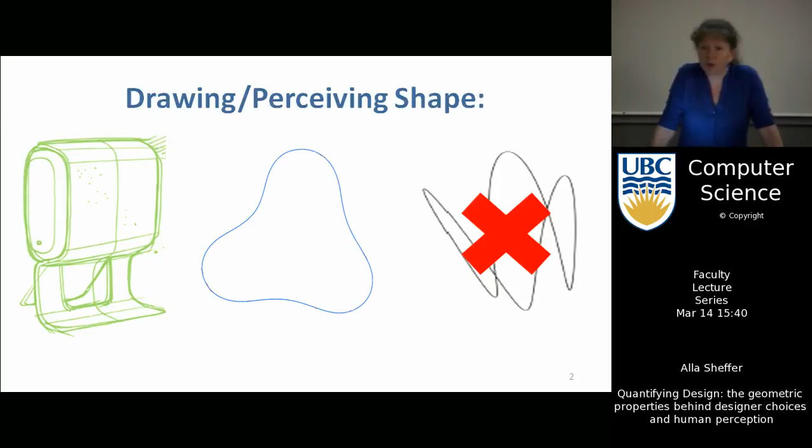Because if you take this object in the middle and you draw its silhouette, by now you don't understand the shape, right? It's a very different shape. You have no clue what exactly happens there in the middle. So the choices that artists make are really there to help you understand what goes on.

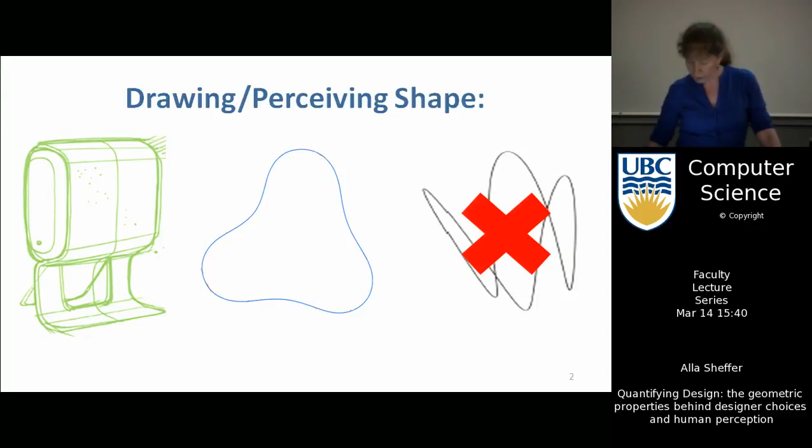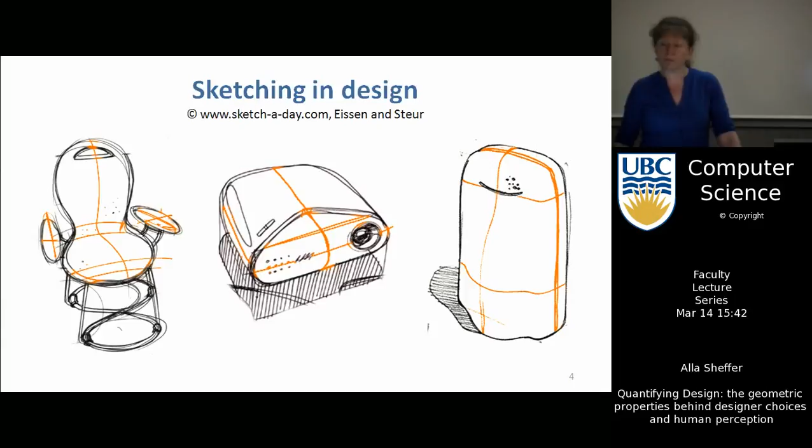What we are interested in is to try and use them to understand what actually goes on in the drawing. So our goal is to start from this type of drawing. The orange lines are the same set of orange lines you have seen before. This is what's known as cross-section lines, that's what design literature refers to.

And the only consensus in design literature as to what a cross-section is, well, it's an intersection of your surface with a plane. If you look at each one of them, you can visually understand what planes those are in 3D. And somehow, with the help of those lines, we understand what this shape is. That's what we are trying to get our algorithm to do.

Why? Well, because if we have an understanding of shape, what we're aiming for is to understand the directions the surface is pointing at. In other words, what we are getting out is a normal field. So where does the surface point to?

Here color encodes direction. Blue is sort of pointing along this axis, pointing over there. Magenta is somewhere there, and cyan is up, right? And now we sort of visualize the shape.

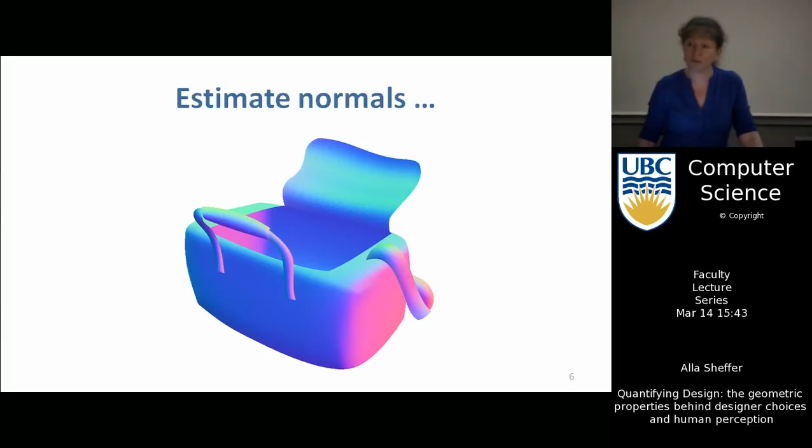Now, why does it help us to get a normal map? Well, because now those people who either took computer graphics at some point or have some knowledge of what graphics does will tell you: if I have normals, I can now use those to compute lighting. I can figure out positioning lights in my scene and figure out the interaction between those lights and my surface.

And why is that good? Well, many people in this room can probably draw this. I don't know if everybody can, it does require a certain amount of artistic talent, but it's relatively fast if you know how to draw, and you can sort of cheat a little bit even if you don't, and do something reasonable. Getting an image like this, that's beyond, I think, the capabilities of most people in this room, and even if it is within your capabilities, it's extremely time-consuming.

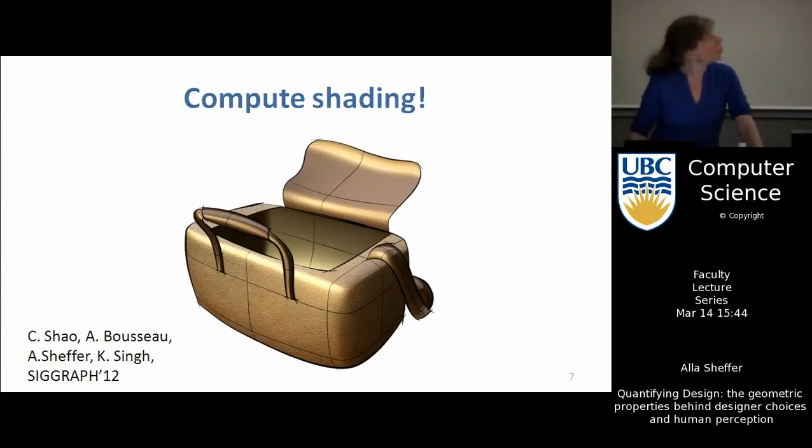Now, why do we want to do it? Because both types of drawings are routinely used by artists. The first group, which I'd refer to as line drawings, and notice that a whole bunch of them have those cross-section lines I was talking about earlier, are the type of things artists use when they have just their initial cool ideas. Here is my cool idea, let me try and describe what it is. So they usually do quite a few of those. They are very fast to draw, and people know how to do that very, very well.

But they also need the shaded imagery. Why do they need it? Well, because it's one thing to communicate with yourself, to commit your ideas to paper. It's another to show it to a client and convince him that, hey, my design is really the thing you want. That's where you really want the object to be more real. You need to generate much more concrete, much more detailed images.

Generating those takes a ton of time, right? You can consider the distance it would take anybody to go from here to here. So what we are aiming is to start from here and have our algorithm get us over here. But for that, what you need is to understand what exactly those cross-sections do.

Because somehow we all agreed that yes, when I show you this picture, and pretty much if I would show it to anybody, they would recognize it as a bag. But why? Why do we look at those lines and understand the shape that's hiding underneath?

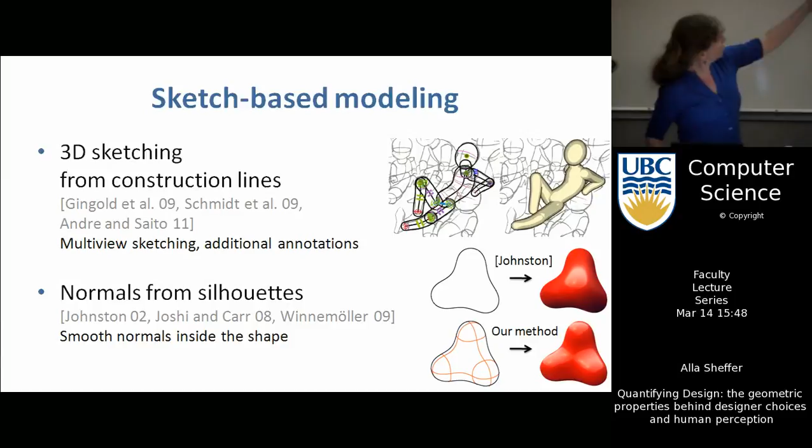With this understanding, with interpretation of those cross-sections, which is lines which artists are used to draw - if you look at artistic drawings, artistic sketches, these cross-sections are pretty much everywhere - with those lines, if we understand what they mean, we can generate the shading. People would actually agree with this, yeah, that's what I intended on this model.

Now, what's the challenge here? Well, we need to understand where and why artists draw cross-sections and how people understand them. Because, well, yes, they draw them. But why do they draw them? When you talk to artists, the answer is, well, yes, cross-sections explain shape. That's a very useful statement, but it doesn't tell us anything about how I make my computer understand the shape the same way.

Now, what I'm going to suggest here is our hypothesis about how that happens. So why do artists draw them, where they draw them? Because artists are not drawing them in random places. Artists are indeed drawing in the places which are necessary to explain shape, except they don't necessarily know how to quantify what that means. And it's very much related to how people perceive it, because the whole point of an artist drawing those lines is so the viewer will actually understand what the artist is drawing. So there's this strong backlink between an artist trying to make the object as clear as possible so that people will actually understand it. So there's two strong linkages here.

And what I'll talk about is what do we think that artists do. And then I'll validate it through both the algorithm I already mentioned for normal estimation, and through a perceptual study, to check whether you, the audience, and people in general, do see those things the way we argue they do.

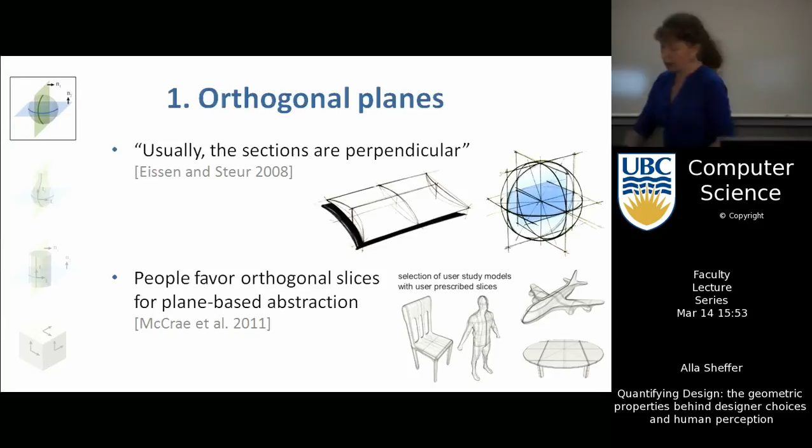So the first observation is, when we look at those cross sections, they are not randomly positioned. They are always, in every image we looked at, drawn in orthogonal planes, right? So if I define a plane for my cross-section, remember cross-section is planar, those planes are going to be orthogonal. What else?

Physicality. Now I'm guiding you toward answers. What else is interesting? What else makes those lines so effective? So the curvature of the line gives you the shape of the roundness.

Curvature. That's a word mathematicians often know, but there are enough people here who took some kind of math at some point in their life. And yes, there is a strong correlation between curvature lines and the lines artists draw.

Now notice, a lot of curvature lines are not going to be planar in reality, but the cross-sections that artists choose are typically very close to curvature lines. So the way artists word it, cross-sections on the surface explain curvature. If a mathematician was to write it, he would say cross-sections are principal curvature directions.

But the people who did the perception research, or the people who do drawing, don't always know those terms. So there's an interesting, related observation from the perception literature: let's say I have this lovely cylinder. If I draw these two lines, aligned with principal curvature directions, and put them in isolation, people will interpret this area still as being cylindrical.

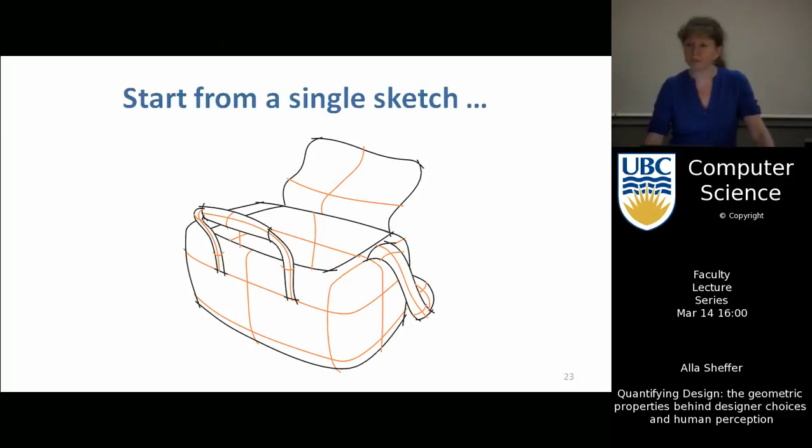Now, I would say there was one more very important observation, and that has to do with the whole image, and effectively with what I'll just call the choice of a viewpoint, because it's something you take for granted when you see an image drawn by an artist, but it's not something which should be taken for granted. When artists choose a viewpoint for an object, they don't do it randomly. You can draw this bag from all kinds of views, but this is the one which is most effective, because it's the one you actually recognize.

This is what's referred to as minimal foreshortening, expectation or assumption, and vision people sometimes refer to it as a non-accidental view. Basically, the idea is when you draw an object, you try to minimize the difference between the depth coordinate and what you actually see. So if you have a totally flat object, you draw it just from the front, because then you can see everything and all your distances are the same. But most objects are not completely flat, so you need to have some distortion.

The distance in 2D on any of those images will never be exactly the same as the distance in 3D. It's impossible. But what people are trying to do, and artists are very much aware of this, is find viewpoints, view choices, choices of poses and positions such that you can actually see objects clearly. A good example: we will never see a person drawn from this pose. If you want a drawing of a person in this pose, it will be in some kind of diagonal view. It will never be drawn from the front of the fingers, because if you're looking at it that way, you have no idea what you're looking at.

So there is really a strong focus on trying to get a good view. What it means for us is you want the change in Z between every two points, say if we're looking at the tangents of our curves, to be minimal. You assume the artist drew it from a view where minimal change happens in depth, because if there is change you're not aware of, then you don't understand the shape.

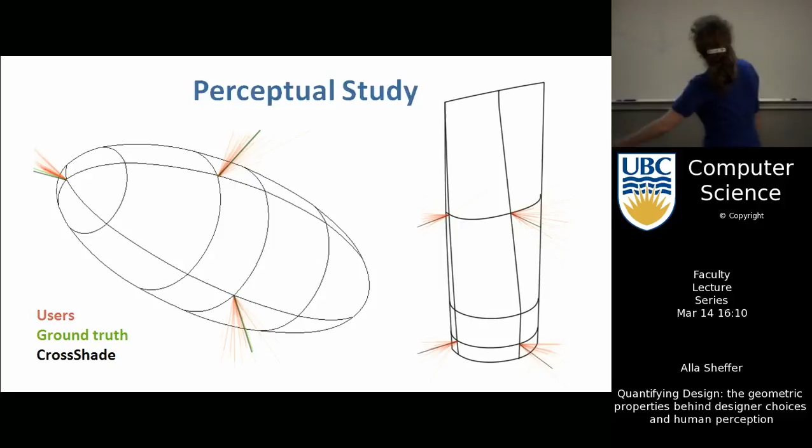Black is what our algorithm is saying. So what you can do, and I encourage you to take that study, is after you finish, it actually shows you where your guesses were compared to others. Now, what's interesting about those results is once you look at the median differences between people—discounting some outliers, which happen because some people either change their mind or get confused—the numbers are remarkably close. Think about those as degrees; 10 degrees is something like this. The answers are remarkably close, as if people give very similar answers. They're very close to ground truth, meaning people are pretty good at estimating the normal direction from those cross-sections or crosshairs, and our algorithm is also pretty accurate.

So that was a very good thing, because it means that we seem to be providing a good hypothesis. How motivated were the human subjects, and were there any timing constraints?

No timing constraints. It was more of a favor thing, not mechanical. It was more, here is a bunch of people I know in the lab, so there were art students and CS students. I don't know the exact mix because my colleagues in Toronto did it, but it wasn't a mechanical Turk setup where there's no motivation. So here I would say they were motivated to try and give good answers. We didn't have to do all kinds of double checks to make sure people weren't just fooling around.

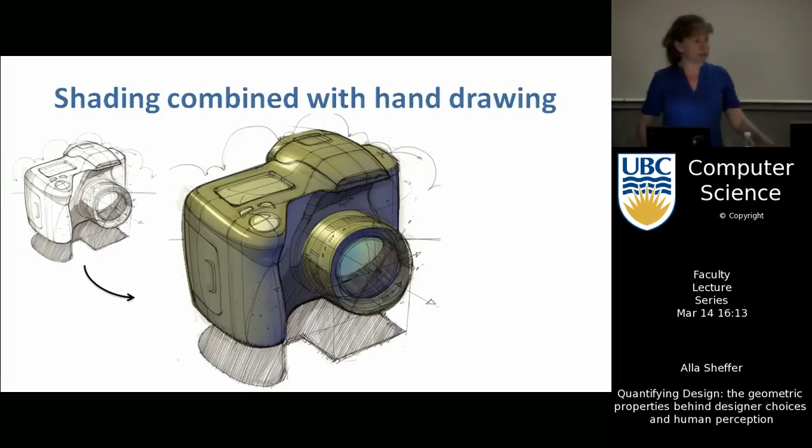Yeah, I think it's a good question. So, pretty pictures. I promised pretty pictures, it's computer graphics. You can recognize this shape, it's fairly simple. This is what the normal map of it comes out, and this is the type of cool stuff you can now do, and it's pretty neat. This came out from an actual sketch, we just overtraced our lines on top, and you can overlay it with the sketch to get really cool effects. Here are two other sketches, and again, you can do pretty cool stuff with them once you know what the normals are.

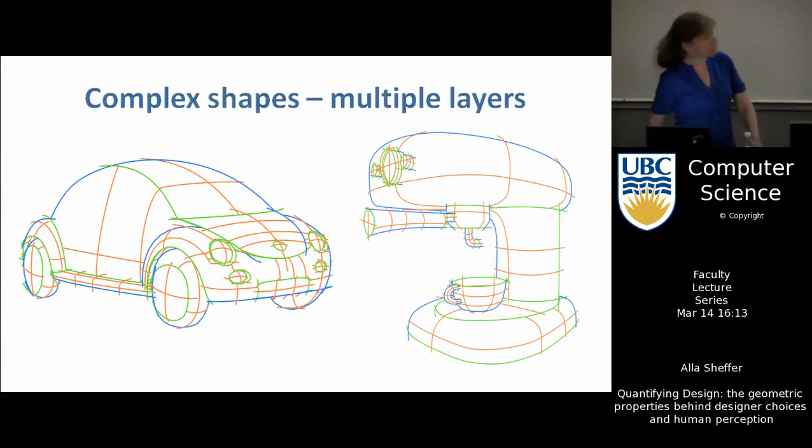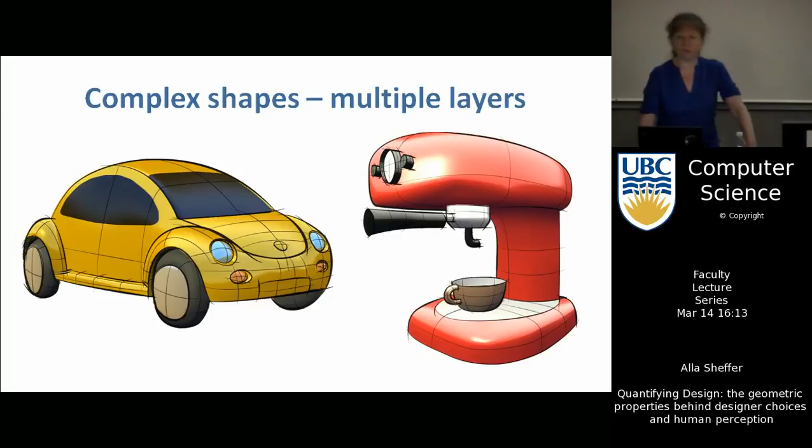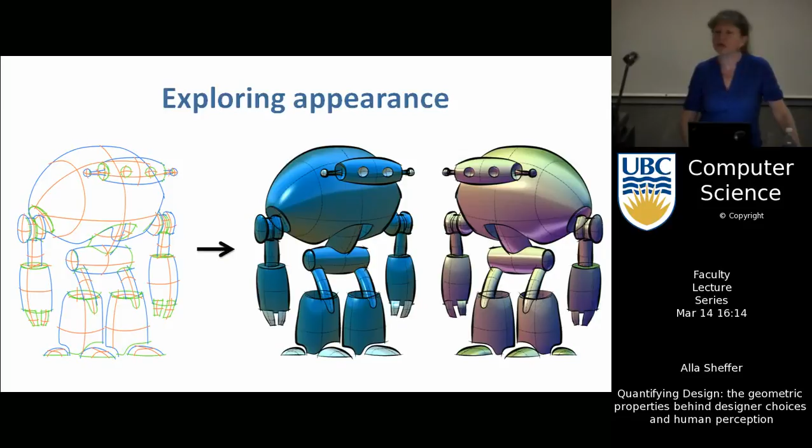Something which is quite a bit more complicated. Here we use multiple layers in the images because there are multiple parts, one on top of the other, so the sketch contains several layers of lines. Again, pretty cool stuff with very minimal input. And one of the cool things is once you have normals, you can change the color, change the direction of the light, change anything algorithmically, and get new pictures basically without any computation.

Just summarizing this part and seeing if I have a little more time to talk about other things. I'd say the interesting bit for me was the mathematics here, trying to answer questions about where artists draw lines and what they intend those to convey, and whether what they intend is what people actually understand, which should be a reasonable assumption, that artists draw things in a way they want people to understand the same way they draw. And we said yes, because that was part of the validation in the study, which said if you have cross-sections, people understand them pretty much the same way. If you take a whole bunch of people, they'll have pretty similar understanding of what the shape of that surface is. And what we got out of it was lots of pretty pictures.

Here is how the interface looks, so the kind of stuff you can now do. As you draw your lines, the algorithm gives you some suggestions of where it thinks the normals are going. And once you do the computation, you can get your normal map. Because you have normals, now you can just move the light around and you immediately get a new picture.

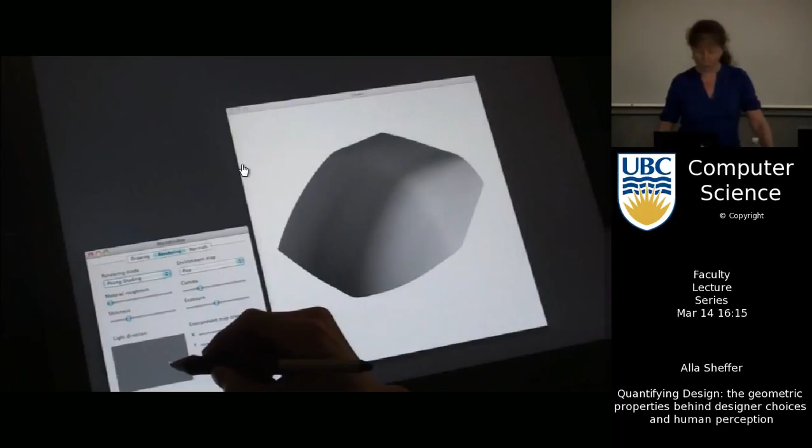And now I have a little bit more time, maybe, because we started a bit late. I'll just mention another problem. But before I go there, if you want to look more, and if you want to try and do the study yourself, crossshade.com.

An important bit I forgot to mention somewhere in between: this is work done, I mentioned already Karan Singh, who is in Toronto, and his student Cloud Shao, and Adrien Bousseau from INRIA Sophia Antipolis. It was published last year.

I imagine it's really hard for someone, if they have a shape in their mind, to actually draw it with these crosshairs. How hard is it? Because none of the things you did basically gave us that challenge. So I'll put it like this: if you are a designer, you are used to doing crosshairs. It's basically, if any design book you open, every second page you'll see sketches which have cross sections. That's about as common as they are, if that gives you a sense.

So if you took a design course, they might be a lot more approximate than you're assuming they are. Well, all the imagery I showed here, all of this, are designer sketches which got traced. So in that sense, they're super common.

How accurate can you be? That's why we are using inequalities. We're not really enforcing things, we're assuming, yes, your artist is inaccurate. Which is actually one reason — what all I'm showing here is shading, and we are not trying in this work to do actual 3D reconstruction. 3D reconstruction is much harder, because that's where that inaccuracy will come and bite you. But for shading, if your normal is 10 degrees off, you won't see much of a difference in the lighting. So even if the artist drew something inaccurately, as long as you get the sense that yes, this is pointing up rather than front, it will still look good. So you have a pretty good tolerance for inaccurate drawing.

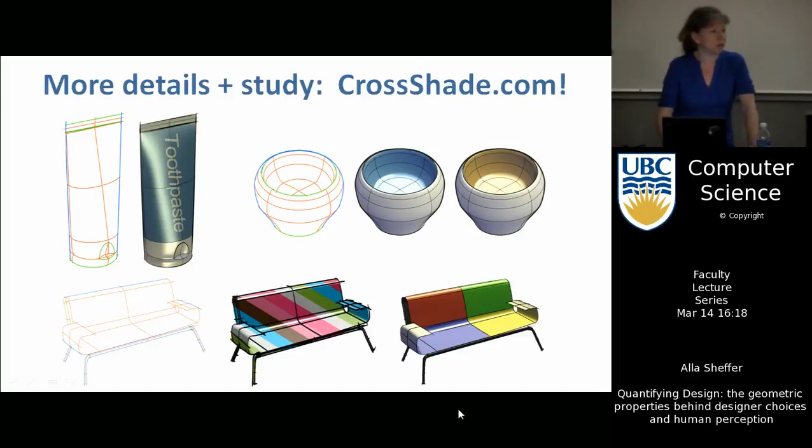Okay, so I'll touch a little bit on another topic I wanted to discuss here. What I talked about here was 2D essentially — namely, we took 2D curves and we got 2D shading. Now, if you want to do modeling, you need to do 3D, right? Because objects around us are 3D. One of the problems we've been very much interested in is how to get from either 2D directly to 3D, which is very hard, because this is 2D — maybe you understand this object, maybe you don't. If you don't, a computer won't.

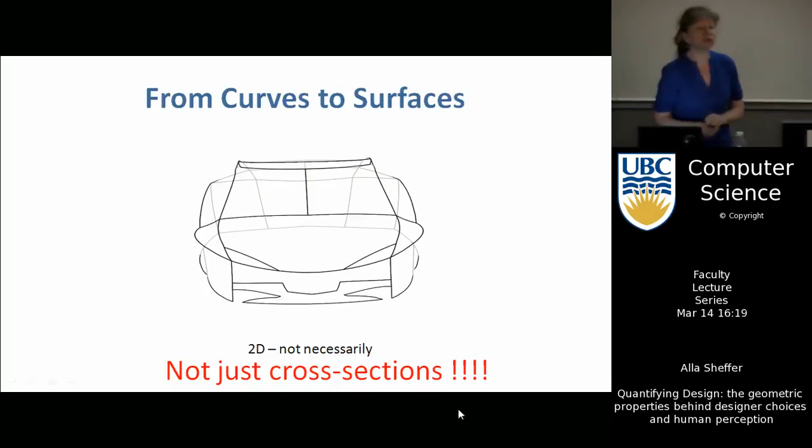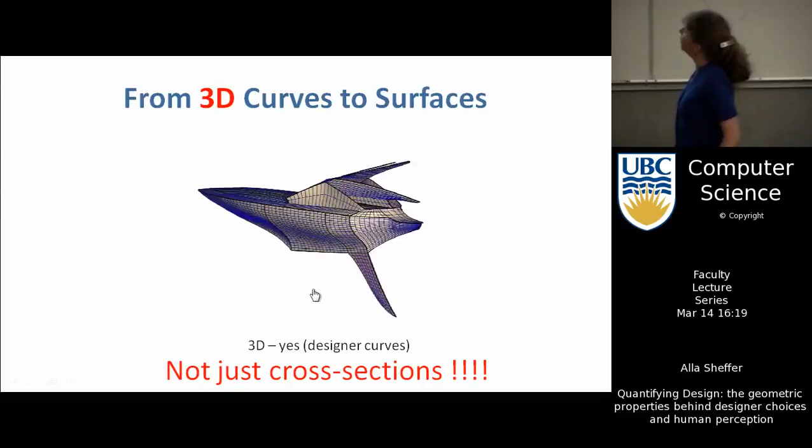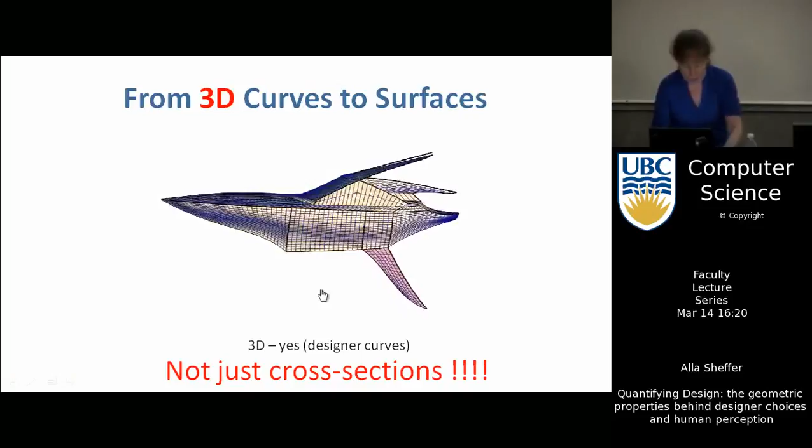So what we said — we looked, now there are tools, I mentioned them already, I'll show a video in a bit, which provide people with the ability to reasonably easily create 3D curves. You can get something like this lovely wireframe. Again, these are designer curves — curves drawn by somebody who actually wants those curves to convey a very clear object. Those are not random curves in 3D. I'm assuming most of you have pretty much the same interpretation of those curves as the one shown in this surface. I'll just run the video twice here.

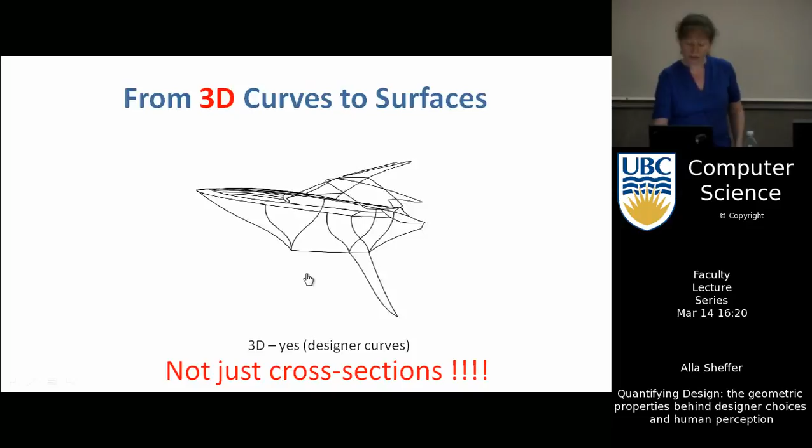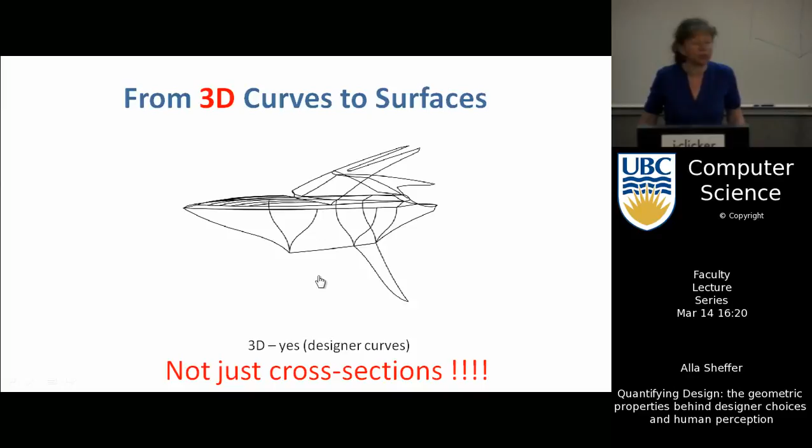And just stop it — here are your curves. Notice we are no longer talking about cross sections, right? Some of those may be cross sections, some of them any other type of curve. There are plenty of curves that artists use, but somehow those curves are very effective in conveying the geometry. So the question we asked is, okay, you can create curves, and there are softwares out there which you can use to get curve networks. But if you want a 3D model, you want a surface. So how do we get from curves to a surface?

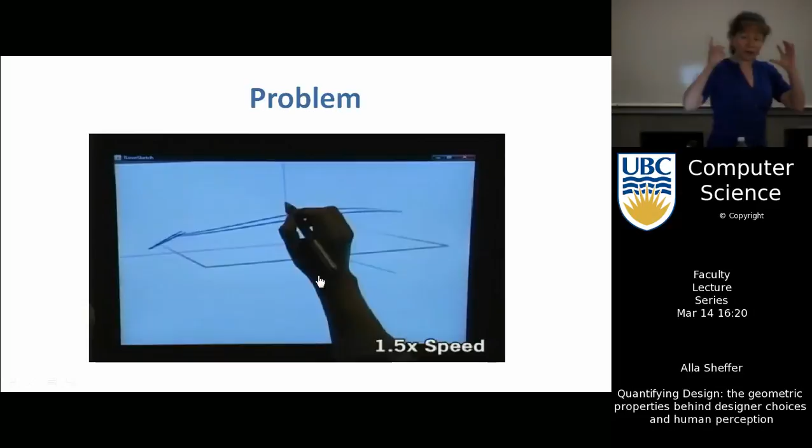And why do we want to do it? Well, because curves are relatively easy. So here is an interface which lets you rotate — that's the part I mentioned, right? You can rotate things in 3D, and in the process create your curve networks. It takes time, it's not as fast as this looks, but you can do it. It's not easy, but doable.

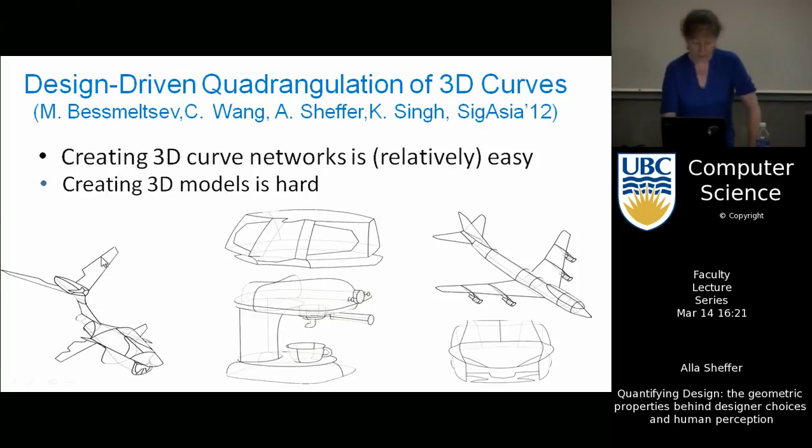Getting from those curves to 3D surfaces is hard. That's the part where most codes basically stop, for now, and say, okay, now you go and manually create your surfaces using whatever softwares are out there, where you are trying to maybe split your loops and do all kinds of stuff.

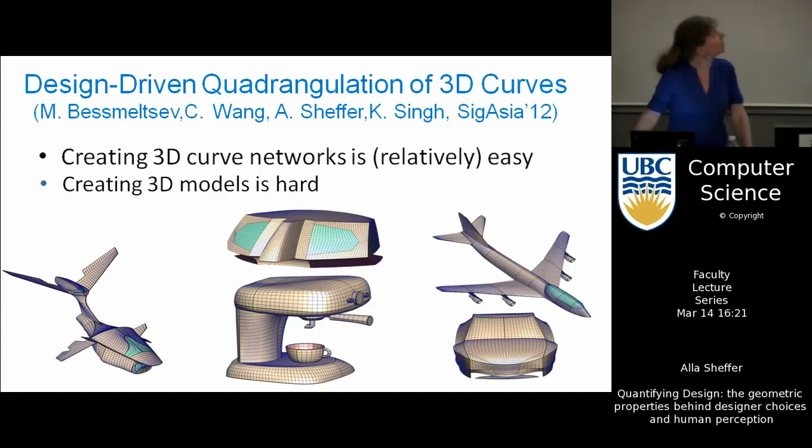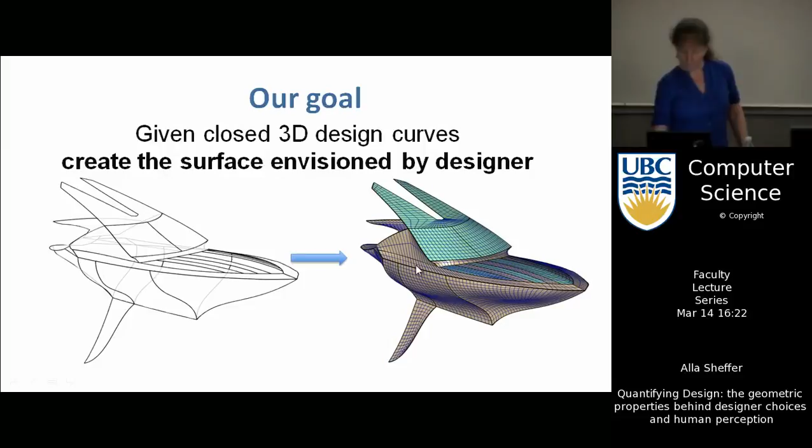When people look at those designer networks, nice networks the designer made, somehow they convey the shape. Why do people understand that shape? We want our algorithm to do the same. This is work with Misha, who is sitting over there, C. Wang, who has since graduated, and Karan Singh, presented at SIGGRAPH Asia last year. So what we want is to go from this wireframe to this surface.

Your boundary does something extreme, because this is the point where we start going away from designer curves, meaning curves for which, when people look at them, they understand intuitively what should connect to what.

There has been some work which says, okay, you have something weird, put a point in the middle, do something like that. Sometimes it works, sometimes it doesn't. If you have something with concave boundaries, it doesn't work. Those methods look from a geometric point of view, rather than asking how you get something that agrees with what people actually expect.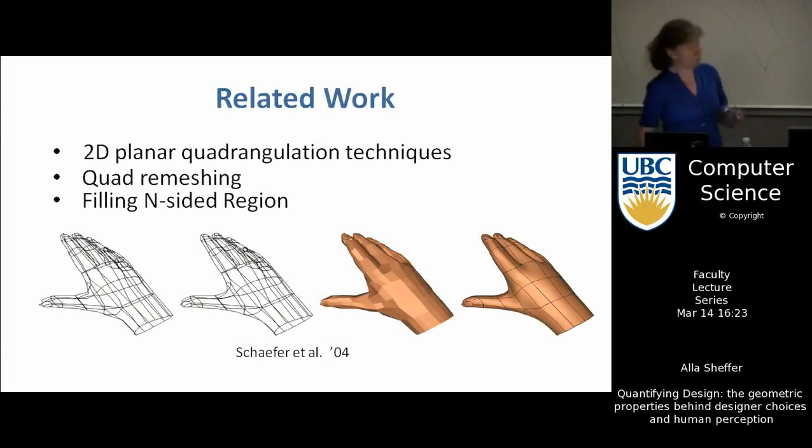What we want is to look at what people expect when they get those inputs. If you ask people, let's say in physics or mathematics, 'I have a closed curve loop, what should be the surface in the middle of it?' Ask any physicist you know, they'll tell you it should be a Laplacian, of course, everybody knows it, it should be a membrane. That's what a membrane looks like. But that's not what you expect when you look at that curve, right?

So why is that? Well, that's also linked to why people like Coons patches. When you look at that loop, what you imagine is a bunch of lines essentially going from this side to that one, and in the opposite direction. This is what, if you look at art books, they call flow lines—there's a flow of a surface. No mathematical definition, but they talk about this flow, and about the fact that the lines they draw are the major flow lines that capture all the important flow lines of your object. When we talk about flow, it's a fuzzy term, but it's roughly related to curvature directions.

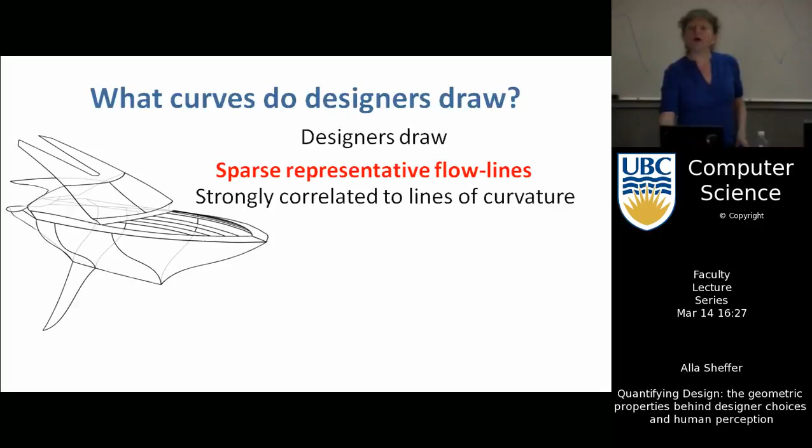So what I'm going to try and do here, and I'll just rush through it, is—as we said—I argue what I really envision is this network I'm showing here. Those are flow lines connecting points of the boundary.

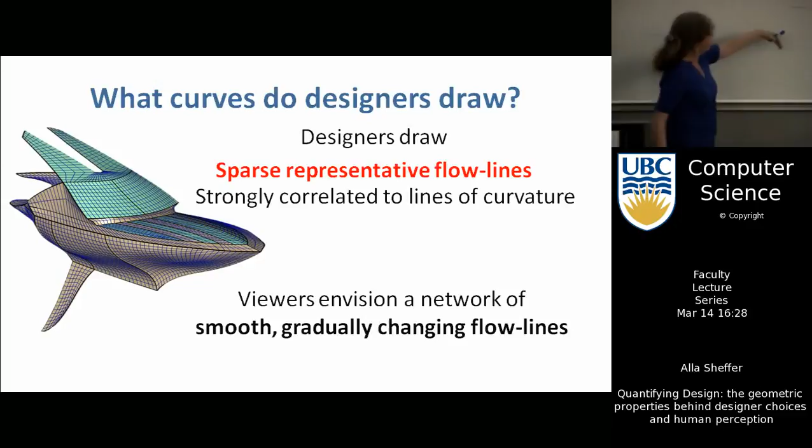When you look at what artists do—this is an example where we started with the wireframe of a boat and another model, gave it to an artist, paid him money, and said: now create a surface which covers this model, and surface it with quads. Why quads? Because that's sort of a standard tool.

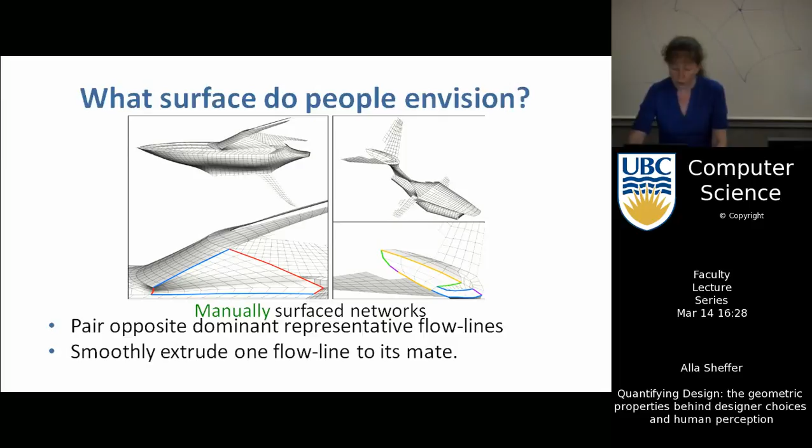When you look at what they do, you really see this pairing of what's perceived as opposite sides. You see those sides highlighted here in the coloring, and these sort of lines of surface going from one side to the next. So what we tried to do is solve this problem of pairing.

Again, here is a network. This is rotating in 3D so you can try to envision it, and hopefully you'll agree with me when I show you the matches—those are the sides you would connect as the pieces on your surface.

Now notice what happens when you're doing these connections: you're connecting sub-elements. In this case, the visual connection links these two portions and these ones. So effectively we introduce a point which is not really in the geometry—it's not a corner, not a sharp feature. It comes out of this need to pair these two sides and these two sides.

Let me go back to the image and show you the wireframe, since I know what it is—I might have run it a bit too fast. You can try to imagine it here, see what this is in 3D and imagine the surface. You'll see the surface is really like two cylinders pieced together. Now our challenge is: how do we find this pairing?

If we had those corners, then people in theory will like what I'm about to say. The right algorithm we argue for pairing, given the segmentation, is... I'm blanking on the name.

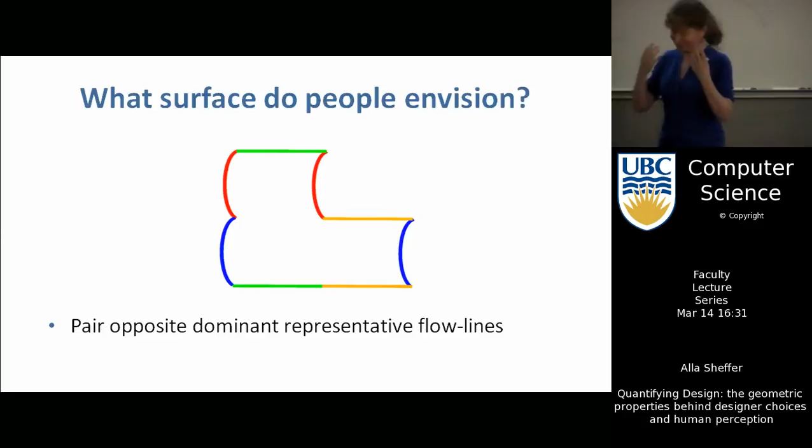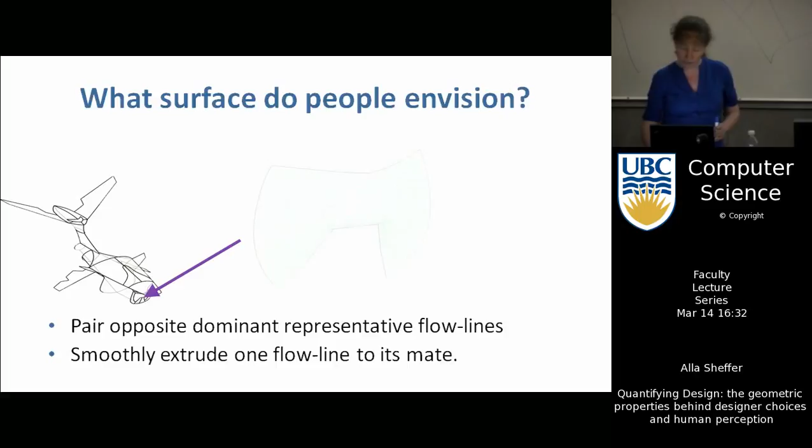But one of the challenges we also have is we don't have the segmentation a priori. We don't know that this side here has to split. So I'm not going to talk about the algorithm, I'll just show maybe a couple more pairs. Here is another matching, and here is the surface.

I'm going to skip a whole bunch of stuff and just show some pictures. Once we have those pairs, there's a bunch of processing going on, which is not that exciting, but if you want, you can look at the paper, which constructs the actual surface from the pairing.

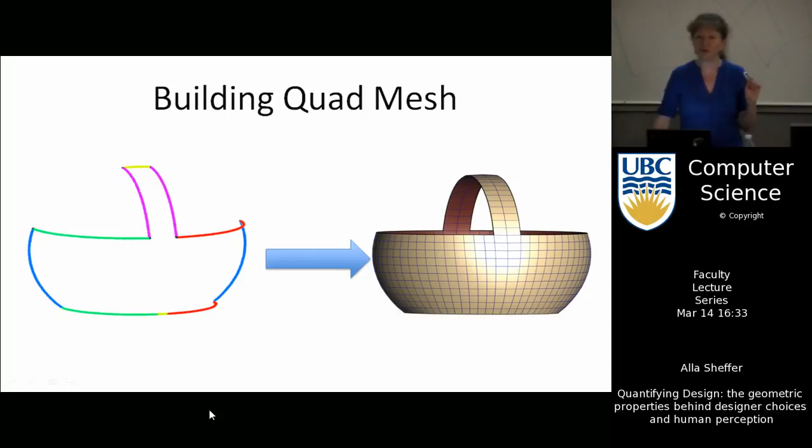But the hardest part is finding the pairing, in particular because you need to split sides in not obvious places. You can start by splitting the sharp corners, where it's sort of obvious that things might change. But the hard part, and there are enough theory people here who want to look at that challenge, is how do we figure out when and where to do splits so as to get the best matches. We are not claiming that what we did is the best thing ever. If somebody wants to look at how to do that, you can see some teary faces in the audience.

So here are some more results. Here you have networks with sort of 5 more or less equal sides, 6 equal sides. You get fairly predictable results, what you would expect to get. Here are some more tricky bits, again trying to take the pictures in 2D so you can still imagine this in 3D pretty well. You can see again it agrees quite well with what you would have done had you been doing this manually, sort of the type of unions of cylinders we've seen before.

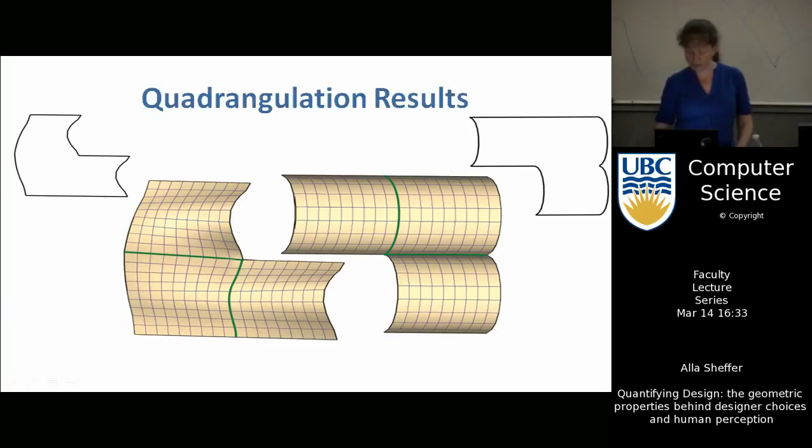Here are some more interesting inputs. One of the challenges on networks is you want your surfaces to fit, or your quads to match well across boundaries. Again, I'm skipping the details.

Another one, starting again from an artist-drawn network. Key, artist drawn, not random. We are not trying to put a random surface on a random network, because random in, random out. What we are looking for is, if an artist drew this, they knew what they were doing. So let's try and guess what they were doing, and what did they expect?

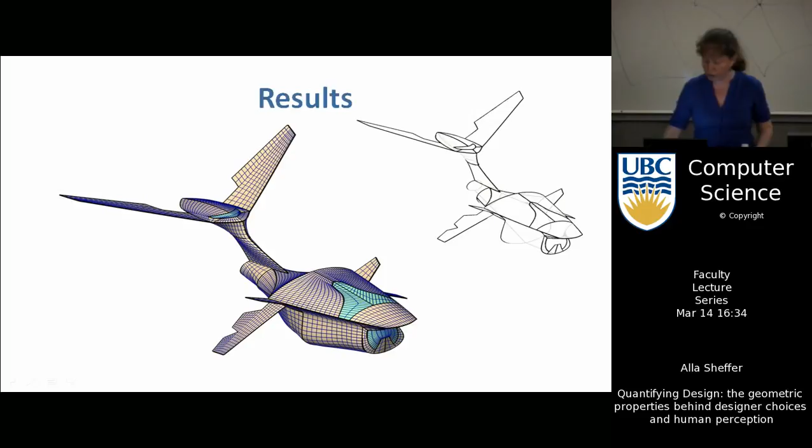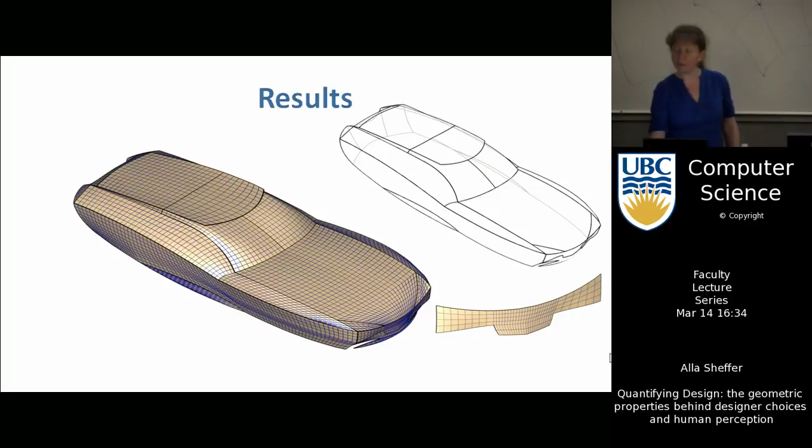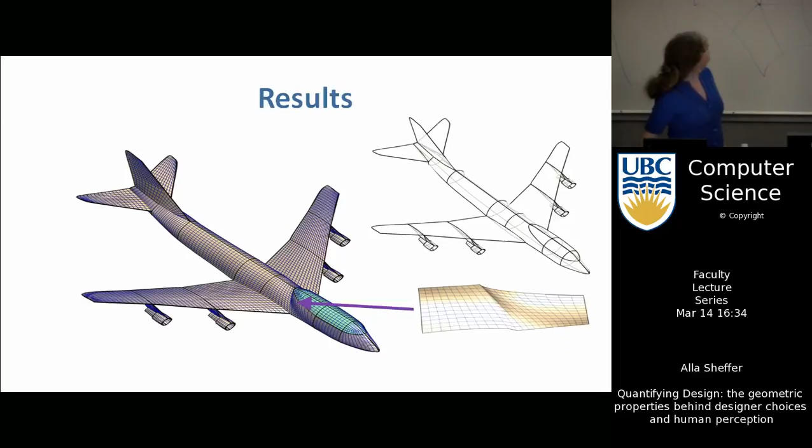So here you can see some non-trivial shapes, again being able to match what is going on there. There's quite a complicated boundary, and matching automatically the parts which should correspond. Again, some more interesting models, weird kind of stuff where you sort of want the matching to fit.

So, to conclude, this was the first method to quadrangulate, or to even surface, designer networks in a way that tries to capture the intent of the designer. The key idea was basically understanding what designers want to a certain degree, this notion of flow lines, what that means, your significant flow lines, and this concept of matching—in a sense understanding why designers like coarse patches so much, because they do. Nobody really had an opinion or understanding of why in particular. Now we can argue that we know why.

And in order to solve the problem of how to find those matches, that's where we use a stable matching algorithm, or a stable matching. Now, as a limitation, we are not looking at the network as a whole. In a way it probably should, because the network gives you extra cues in addition to just an individual curve.

So, take home message from the whole thing: artists know geometry, they just don't know it's called geometry. Namely, artists—designers in particular—do make certain choices because they are taught design, so they are taught certain choices which are very good choices. They don't know necessarily why those are good choices, they just say, okay, this is a good idea to do this. But they don't necessarily know how to quantify it. And that is inextricably linked also to how observers, how we see geometry today.

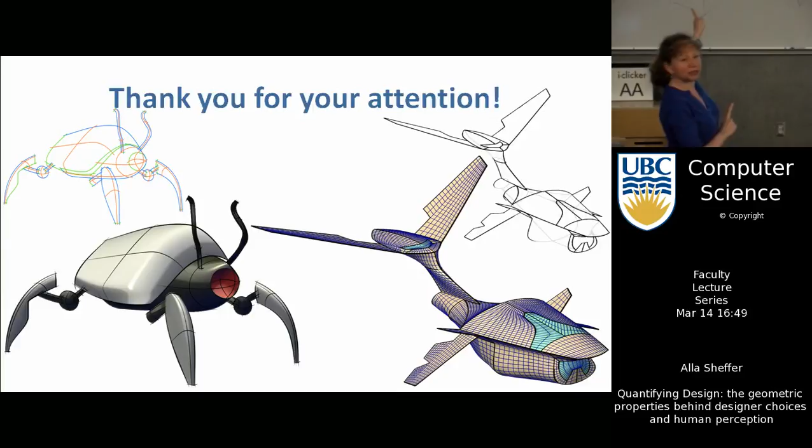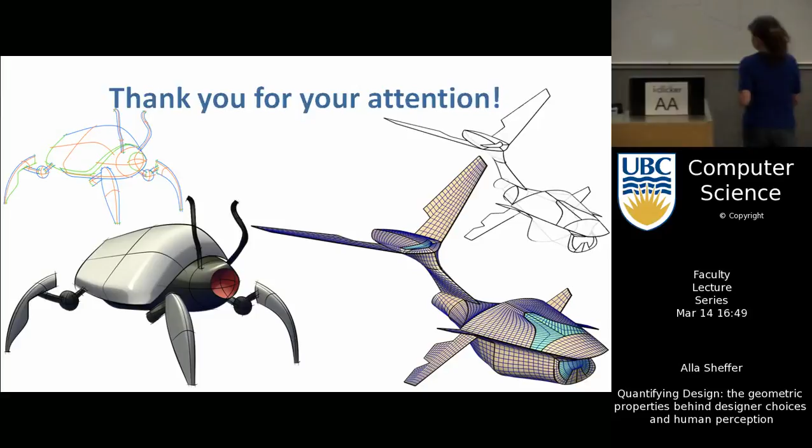This is, again, remind us, this is a shaded image. There is no 3D here. I'm cheating, I'm completely cheating, right? I have a normal map, which means all I know is where the surface is pointing. In this paper that I'm discussing, you don't know which part, how far, for instance, this leg is from in front of the body. It can be like that far or this far.

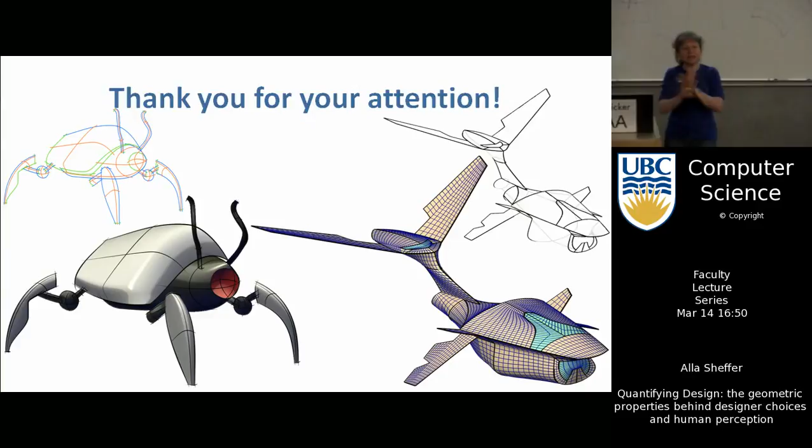Like, there is no depth here. So no, I also don't know if there is a fourth leg. There is nothing which analyzes that, right? There is no 3D. All I know is, given those lines, I can take a pretty good guess what the normals are.

In this actual work, did you try to make any sort of attempt to use a 3D reconstruction in order to enforce some consistency for the normals, or is it just so noisy that it's hopeless?

You don't necessarily, well, you can do what's called Poisson reconstruction, which is you start from normals and try to get 3D. It's not really well defined when you have depth discontinuities, and there are all kinds of issues. Talk to Brian, he's doing actual 3D reconstruction from this type of imagery, where you need to use a lot more machinery than just the normals. So it's, yeah, getting a real 3D is way harder than getting normals.